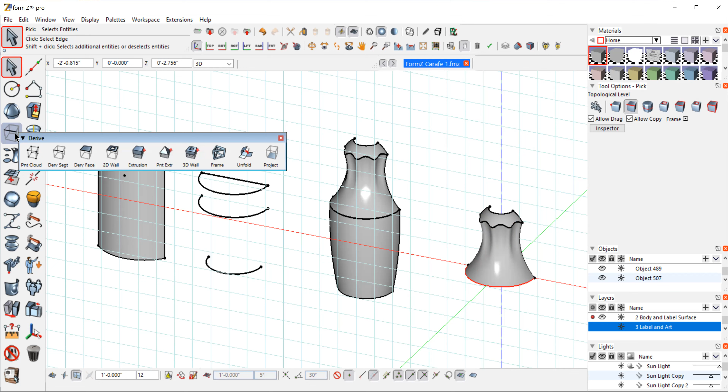So this whole bottom section here is pretty straightforward. It'll be another loft. And we want to start with the segment at the base of this neck detail. So I'm going to my pick tool. I'm going to select that segment at the bottom, and then I'm going to go to my derive tools under derive here, derive segment. So I'm going to click on that. The top part will be ghosted, so it's still there. We didn't lose it. I just don't need to work with that right now.

So that segment I have in the back here, that's just a guideline that I put there so I can snap to that. So I know that's right on center. So the actual line I derived was just this curved shape in the front. And that's going to be the beginning of this loft at the bottom. So this loft is created by all three of these segments. That top one is the one I have already over here. So I'm just going to bring these other two over. And we can talk about how I created them and why. But instead of spending all the time building that now, I'll have them ready to go.

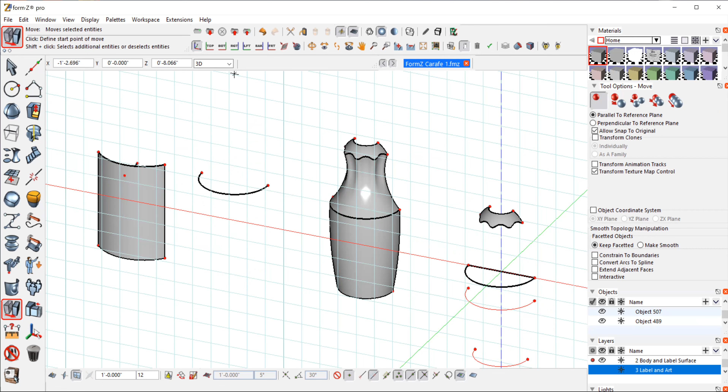So I'm going to do this 30-60 projection. So I'm snapping to the center of that straight line. So I have all these parts, and then I'll just snap over to this center line so I know that everything is on center. Let's go to my pick tool. So these are the three lines that are going to create this loft. So again, it was a little trial and error. This top line, we want that because that's what's actually going to allow this surface to be stitched to the top neck detail. Let's just show it's still there.

And then the bottom one is basically an arbitrary decision about how big I want that base. We don't want the bottle to fall over, so I didn't make it really small. I didn't make it too large. So I just scaled that down, that half curve. I'm not worried about creating a ruled surface right now. I'm just caring about the aesthetics of this bottom of the bottle.

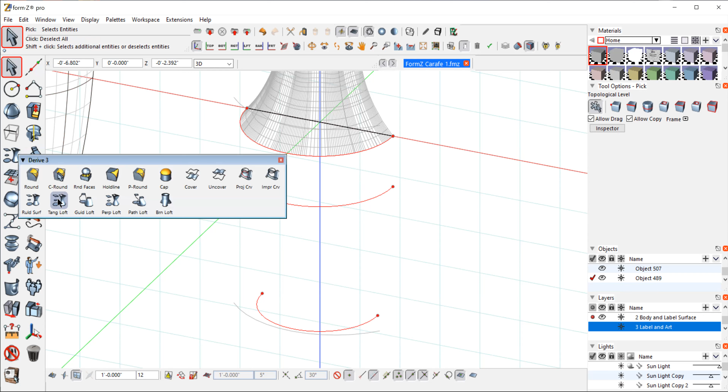So that's the bottom. And then this one in the middle is the one that I moved around. I made it a little bit larger, moved it up and down, and then it was trial and error to create this loft. So what I came to the conclusion was if I loft this as I have it set up here, it's a nice shape that works really well. I'm going under Derive Tool, and I'm going to my tangent loft. So this was the shape that I wanted to go with that worked well. That gray area is our neck. So this I thought looked quite nice.

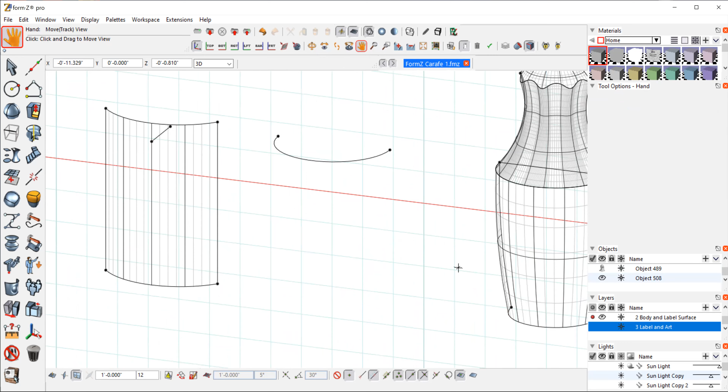But I also have to consider, since I'm not creating a ruled surface for here, I am going to trim that object with this surface over here, which is a ruled surface. So when I trim those two together, that curved shape is going to give us a very definitive label area, which we'll see in a moment. So those are design decisions that we have to go back and forth and make and see how that's going to work with the graphics.

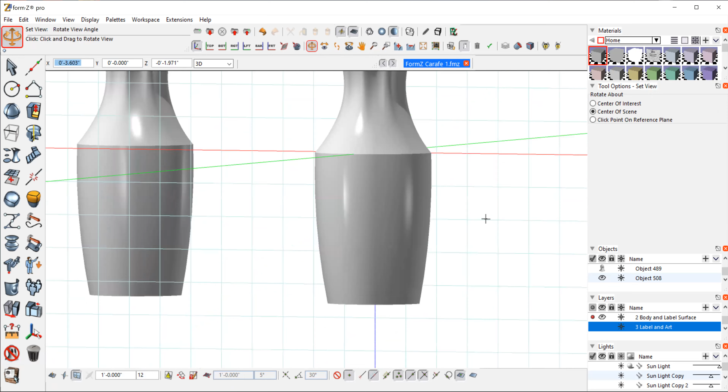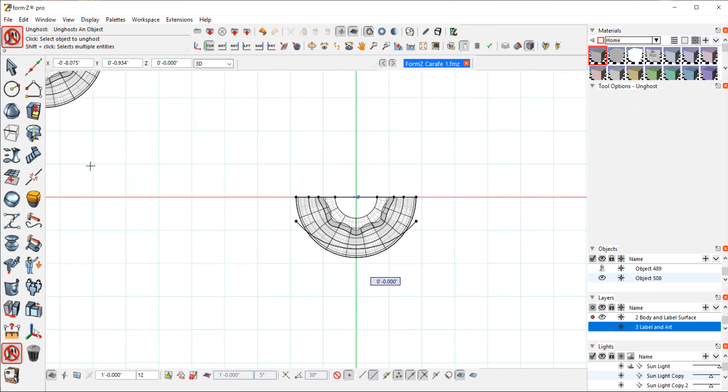So let's unghost these. View from the top. So those are my segments. I'm just gonna make sure they're nice and centered. They look good. I had built these earlier. Again, it's a bit arbitrary. It's about how much curve I have on these and where they are positioned on that surface. And we'll see why that's critical.

So this will be a simple loft. I'm going to grab that top segment. I'm going to grab this one at the bottom. And I'm just going to loft those. And that's a ruled... Oops. Didn't do it. What's going on?

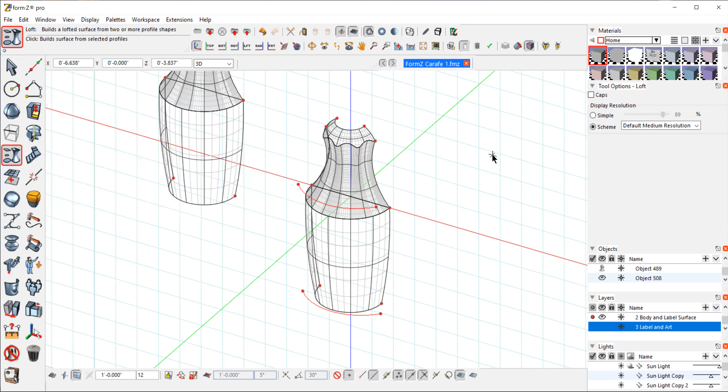So right now we can't see it, but if I turn this on, I can see the intersection. All right, so this isn't even positioned on center. Aha, okay. That's why we keep track of all these parts here, as we can see now, as we view from the front.

Okay, these lines are off center. Okay, so the bottom one looks good. This top one is wrong. So all I'm going to do is delete that. Select this one at the bottom, and I'm going to move a copy of that straight up, and I'm going to lock to vertical and horizontal. So I'm going past my center point because I know it's going to be separating from that neck area.

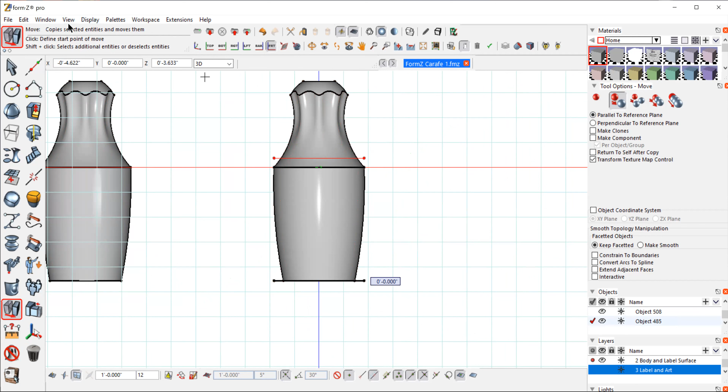So we can double check that by looking in the right side. It's still a little close. I need that to clear. Okay, barely clears. So let's just move that a little bit more just to make sure that we're going to clear. And I'll show you in a minute why this is significant. So when I create the loft between these two sources, it is going to slice through the rest of this bottle. So let's take that source, this one, and we'll loft that.

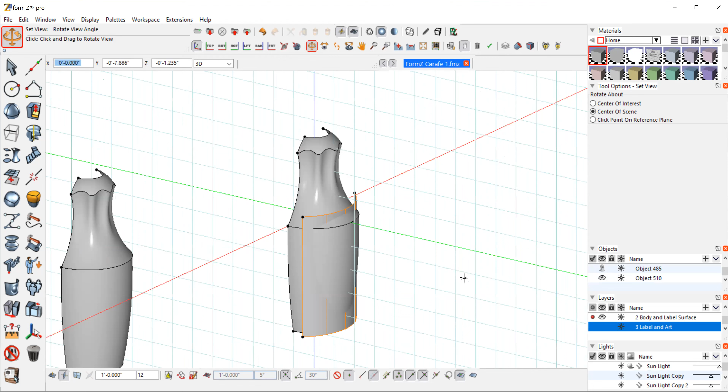So now, since we're in this gray mode, we can see what happens. If I take that surface, that ruled surface that I just created, and I trim that away from the bottle, we can see that intersection. That's approximately what our label area will look like before I radius it. So I had set this up before and I had made some decisions. I think this looks pretty good. It gives us a nice label area with this definitive look to it.

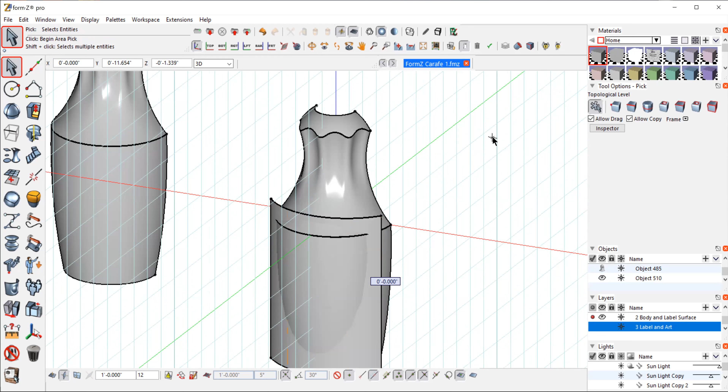So I'm going to trim split, but what I want to do is I want to trim split that surface through both of these other surfaces. So I'm going to stitch them all together first. So let's select the bottom one, neck detail, and then this trim part up by the finish. I'm going to stitch that all together.

So like we've done this other trim split operation, we want to select the surfaces in the part that we want to keep. Right now, I can't see the part I want to keep for this trim surface. I can only click this outside part, which is the part that I want to go away. So we have to be careful about the selection. Here, I can select what I want. I want the entire bottle, and I'm going to pick up here. I can't see inside. So if we go to our line visualization, not the gray, we can now select those two. I can see inside here, and I'm going to pick that.

So we're going to go to the stitch tool. No, I'm sorry, trim split. Come on, trim split, both objects, and no stitching. So we're going to talk about that later. So I'm going to hover around here with my cursor. So there it is. So I selected the surface in the center here, not on the edge. This can be a little confusing.

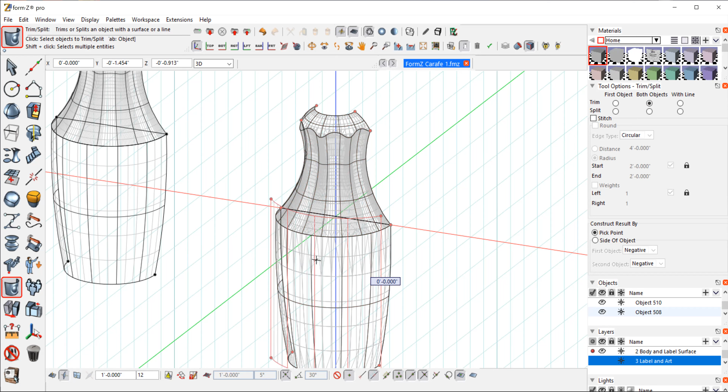So right now I'm selecting the entire bottle. I want to move around and I want to select that surface in the area in here that I want to keep. So I'm going to select this, and then I'm going to select the rest of the bottle. Now these two things trimmed one another. And if we look at it in gray, we can see there is that shape that we have trimmed.

What's nice about this, we have this kind of oval shape down on the body, and then we have this slight arc at the top, which is kind of nice, because this is where the label area is going to go. So that's a nice solution there about how that works and how that fits with the neck.

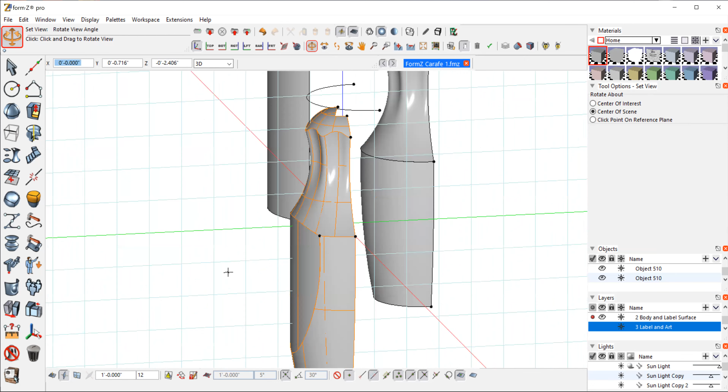I could have done that with stitch, but I'm going to do this independently in case I want to undo just the trim. It's because these are two separate parts right now. So if I select this one and this one, I can stitch these together.

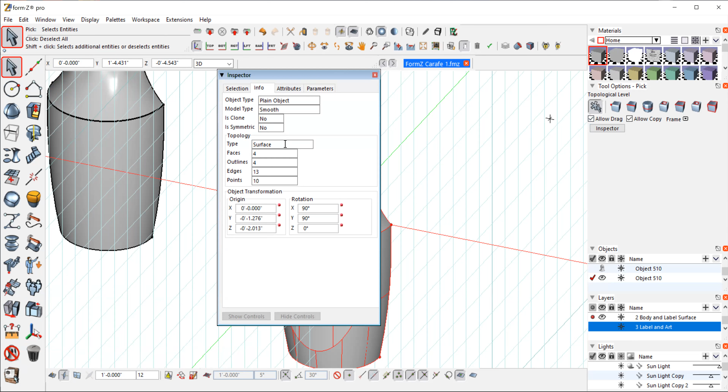So now this is all surfaces. Again, if we select that and go to our inspector, we can double check ourselves and make sure. It says surface. So that means all of those surfaces are nicely stitched together. Like I had mentioned once before, if this were to say surfaces, something's wrong. Even though it's stitched together, they're not quite lined up, and it's still reading it as separate surfaces. We want it to be all one. Just to double check how to do that.

Okay, now I'm going to work on some radius solutions here. So if I go to my radius tool, which is the first one in Derive 3D, I'm going to radius this little corner right here on both sides first. And then I'm going to radius these other edges. But it's going to be a little bit of an experiment. I'm going to go pretty big. I'm going to go, let's see, 0.5

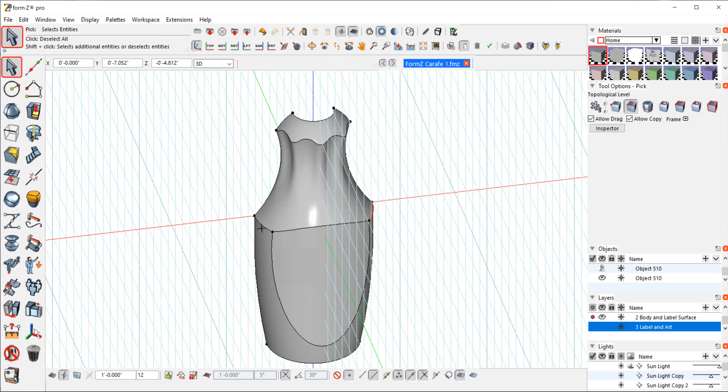on these two. So I'm going to go to my pick tool. I'm going to go to segment. I'm going to select just that segment and the one on the other side. Hold down Shift. I'm going to radius 0.5. Okay, looks a little small. I'm going to go quite a bit bigger. Let's try 0.75.

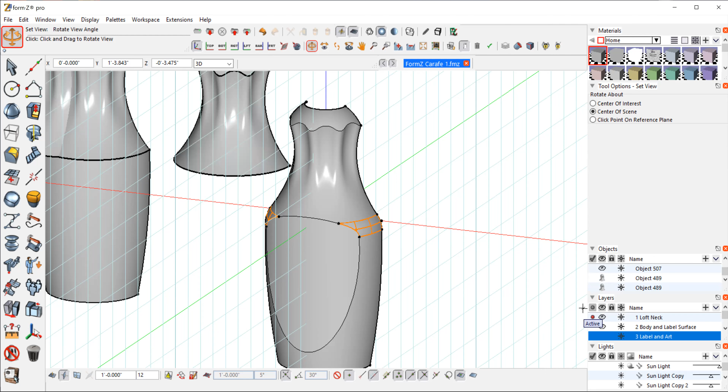This is an arbitrary decision. It's just aesthetics. And I'm looking at, see how it's starting to affect my label area. So we're going to get this nice radius at the top. I'm actually going to go back and double check and see where I was on that. Oops. Let's go to my layers. You can see I'm just looking at that radius over there. I think that's about what I did. Okay, that looks good. I didn't quite remember what I did. I'll go with that. We'll just deselect that. So that works pretty well.

So now I'm going to radius this other area, which is going to frame out our label. Since I have this continuous string of segments, I can use this tool here, which is segment sequence selection. So if I grab here, it's going to select all of those. So I don't have to do it individually. And I'll go to my radius tool. And again, I'm not sure exactly what I did. Let's try 1/8. So this we're going to do at a tighter radius.

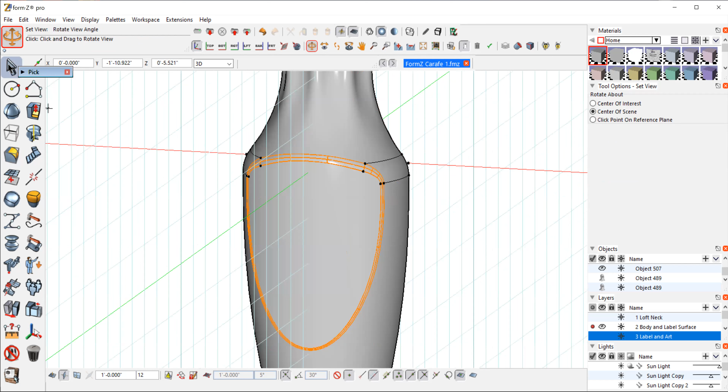That's a little too tight. Let's try 1/4 inch, 0.25. Okay, looks pretty good. Gives me a nice soft radius up in here. And since these are not at 90 degrees to one another, we can get away with a softer radius. Up here, I need to soften it a little bit more because it's a very vulnerable point on this bottle. So we don't want that to dent. Okay, so now the bottle is complete. I've worked on my radius solutions.

We could do this one also. This has been stitched, so I'm going to select that one segment there. I'm going to soften that up because right now that is a pretty hard edge. And we could try 1/4. Let me see. No, okay, so that's too big. That warning will come up. Let's do 1/8.

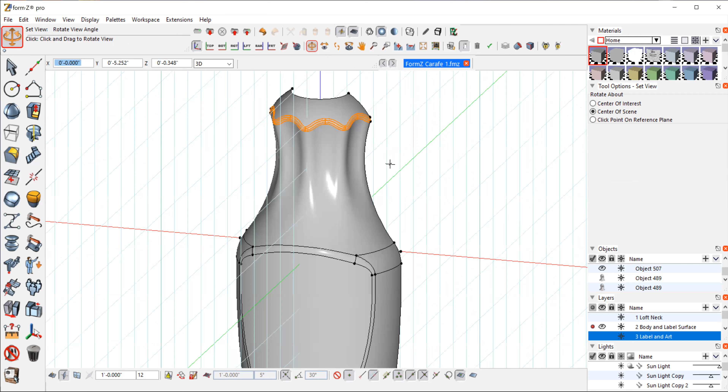Okay, that's why it would have been too big and would not have worked in all that curved area. But that looks really nice. So we still keep that edge quite firm. I call it firm, where it's not too soft and it kind of goes away. So that looks quite nice. Yeah, so now we can really see that reverse curve pattern at the top there on this neck. So this looks good. So this bottle is just about complete.

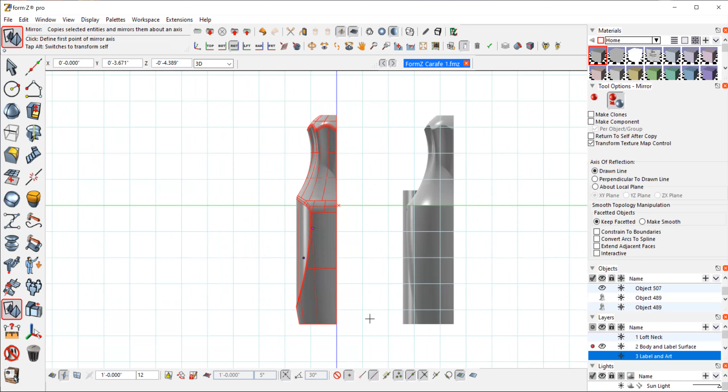Like I had mentioned, I'm only building the first half. So all we have to do is mirror that around to the other side. And that's our entire bottle. Again, like some of the other tutorials I showed about volume checks, we could also do that. We could put this together, put a cap and a bottom on it, and we could difference that and make it a smaller shape considering the wall thicknesses, and we can check the volume on that. That would be the same process that I've shown in the other ones.

Okay, so this is our bottle. So it looks quite nice. In the next tutorial, we're going to talk about deriving the actual label shape. This is the label area, and we need to create some clearances. So I'm going to talk about that in the next tutorial, and then bring some art in on the label.